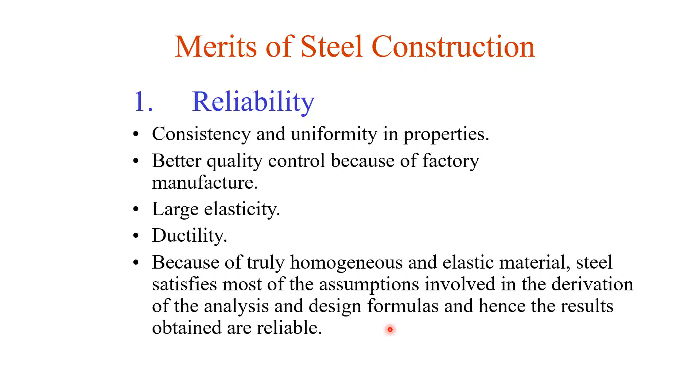For example, in concrete, we start from Hooke's law, and in Hooke's law we assume that the material is homogeneous. You can say approximately in steel the whole material is homogeneous, and that's why it satisfies Hooke's law. So that is again the reliability.

Industrial behavior. Hot rolled steel sections are manufactured in factories, and members may be cut and prepared for assembly in the factories.

Meaning, for example, this much length of steel member is needed, we can cut these members in the industry. Only joining of these components is carried out at the site by installing rivets or bolts or by welding different components. Meaning in the factory we manufacture the steel sections, we cut the steel sections, then we bring these steel sections to the site and connect them with connecting elements like rivets, bolts, etc.

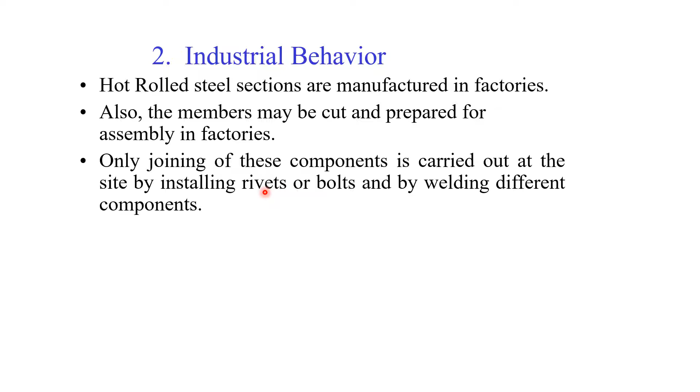Sometimes part of the structure is also assembled in the factories. That is therefore great adaptation to prefabrication. Nowadays the prefabrication industry is also growing.

So now you can see around that different types of prefabrication and prefab buildings are present, and manual errors reduce greatly. In such cases, the speed of construction increases and the total cost reduces. Why? We cut almost all the sections in the industry, so labor cost will reduce.

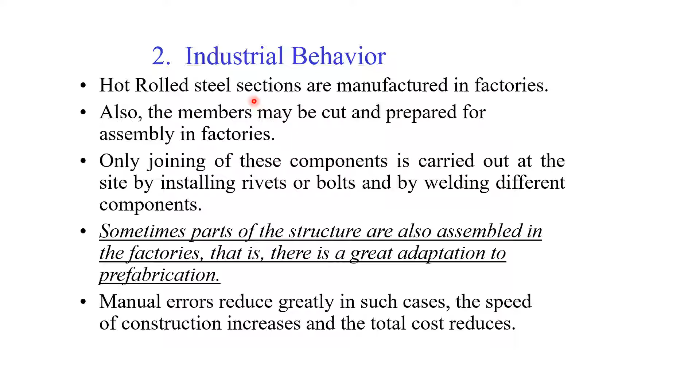We can make our buildings in lesser time. Lesser construction time. Because of the industrial nature of steel construction, progress of the work is very fast, making the structures economical due to the industrial behavior.

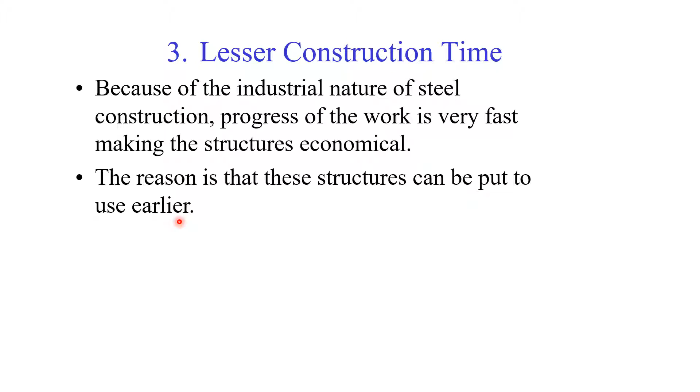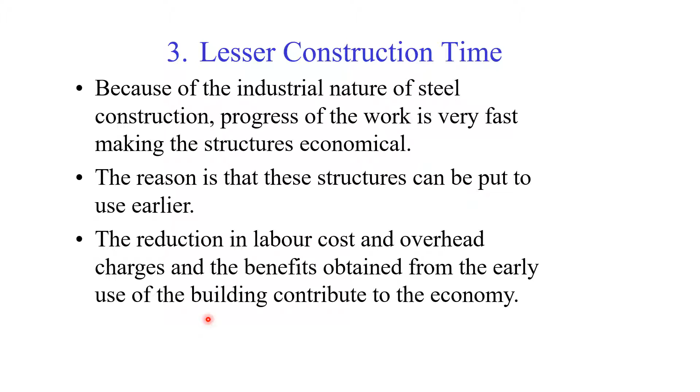The reason is that these structures can be put to use at an earlier stage. Meaning if our building is made in only 1 month, that is very good. We can start our business - that is, we can have early occupation of the building or early start of the business in the newly built structure. The reduction in labor cost and overhead charges, and the benefits obtained from early use of the building, contribute to the economy.

High strength to weight ratio and lightweight nature. Steel provides high strength per unit weight. Dead loads become lesser because steel sections are stronger but lightweight as compared to concrete. Dead loads are a bigger part of the total loads on a structure.

When dead load reduces, the members underneath become smaller. When the whole structure's load is less, the members that need to be designed will be of less weight. This is more important for long span bridges, tall buildings, and for structures having poor foundation conditions. At these locations, steel structures are also good.

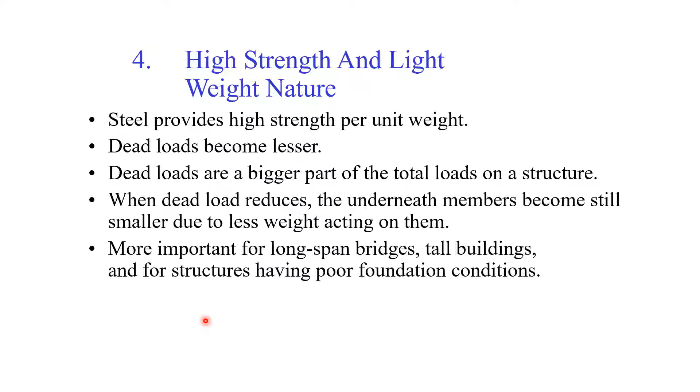Here is a differentiation of the weight to strength ratio - this is density over strength. You can see the ratio for steel is too good, that is 3.2 times 10 raised to power minus 4. When we divide the density by the strength of the material, we get these ratios.

You can see concrete is too heavy, wood is less, steel is lesser than wood, aluminum is also lesser than steel. So aluminum's cost is large, so that's why we go for steel and its structural properties.

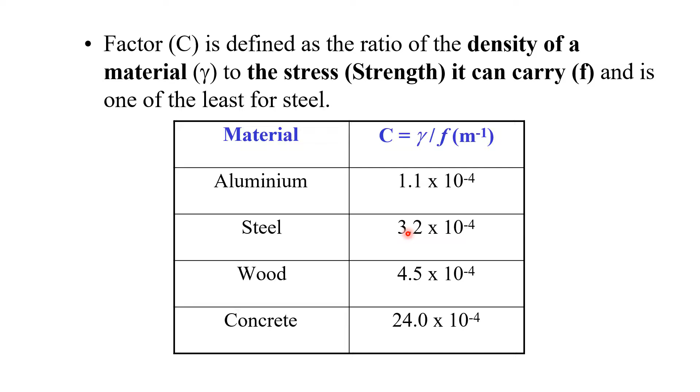Uniformity, durability and performance. Durability means long life of a structure. Steel is a very homogeneous and uniform material.

It satisfies the basic assumptions of most of the analysis and design formulas, due to being a homogeneous and uniform material. If properly maintained, with painting to avoid corrosion, etc., the properties of steel do not change appreciably with time. Hence, steel structures are more durable.

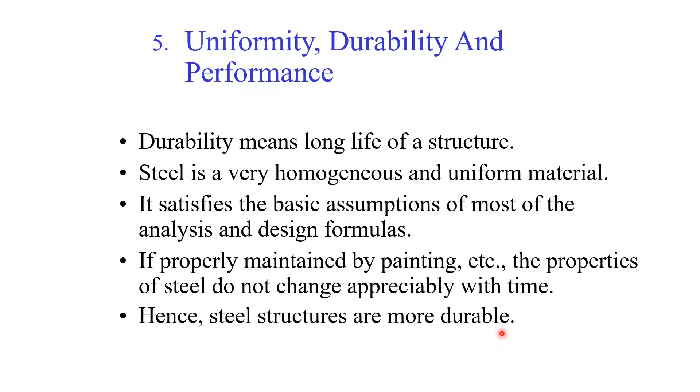The sixth property is elasticity. Steel behaves closer to design assumptions than most other materials because steel follows Hooke's law up to fairly high stresses. I think you know that steel, up to the yield point in the stress-strain curve, follows a straight line.

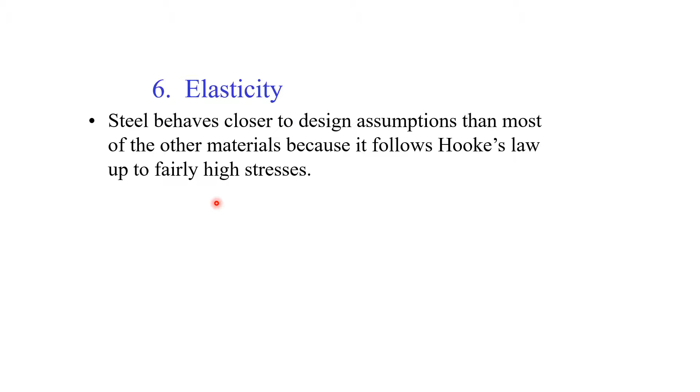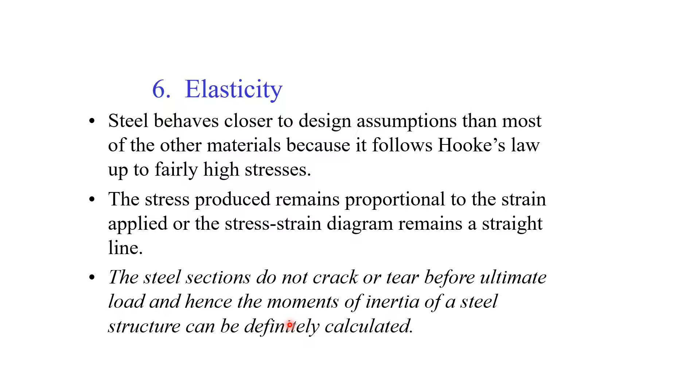The stress produced remains proportional to the strain applied; the stress-strain diagram remains a straight line, that is Hooke's law. The steel sections do not crack or tear before ultimate load, and hence the moment of inertia of a steel structure can be definitely calculated from the full uncracked cross section, so there is no chance of a crack moment of inertia in steel sections.

What is ductility and warning before failure? That is the seventh merit point of steel structure. The property of a material by which it can withstand extensive deformation without failure under high tensile stresses is said to be its ductility. After the yield point, steel has large deformation, and in the high tensile region this material can withstand large deformations without final failure. That is ductility, also known as warning before failure.

With large deformations, the occupants or residents in the building can evacuate or leave the building so that they can save their lives. That is the warning before failure. If there is excessive deformation, the occupant or resident will leave the building, which comes under ductility.

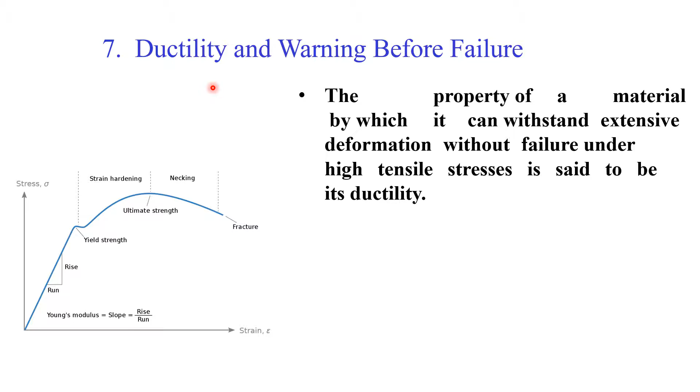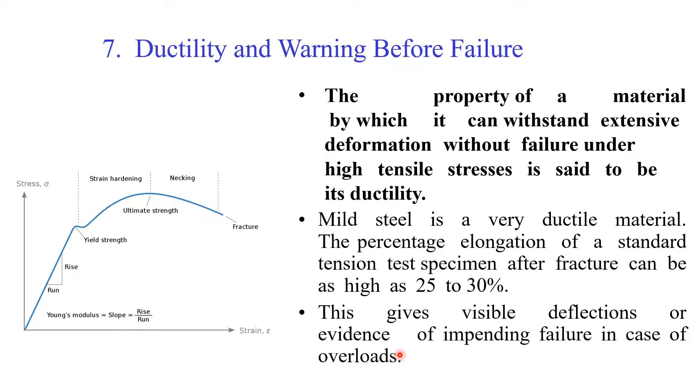Mild steel is a very ductile material. The percentage elongation of a standard tension test specimen after fracture can be as high as 25 to 30%. When we perform the tension test on steel bars, its length increases 25 to 30% of the original length. This gives visible deflections or evidence of impending failure in case of overloads. If heavy forces or heavy loads come on the building, there will be large deformations and the occupant can leave the building.

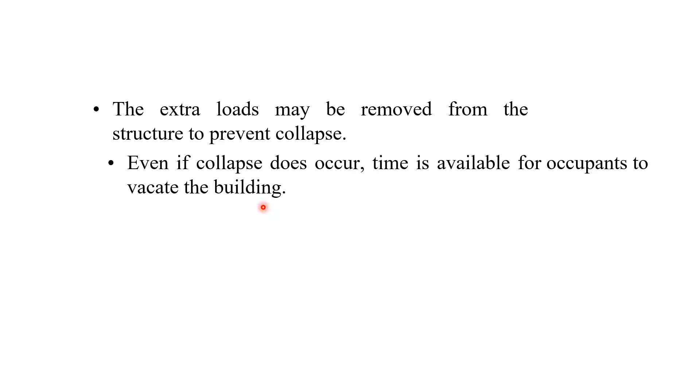If there is large deformation, one option is that the extra load may be removed from the structure to prevent collapse. Second, even if collapse does occur, time is available for occupants to vacate the building. So that is the warning before failure.

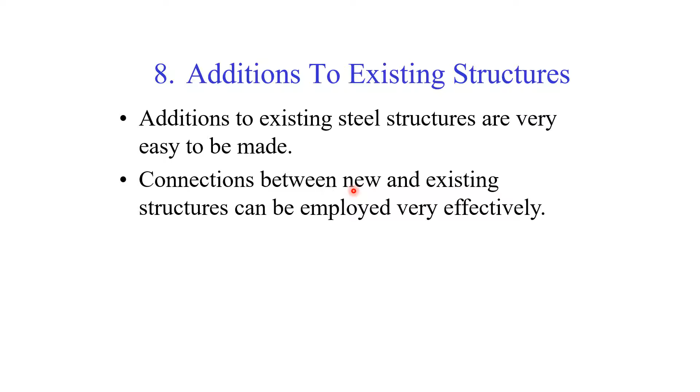Additions to existing structures: additions to existing steel structures are very easy to make because you can build the existing steel structure to extend or create a new story above the building. Connections between new and existing structures can be employed very effectively. New bays or even entire new wings of buildings can be added to existing steel frame buildings, and steel bridges may often be widened.

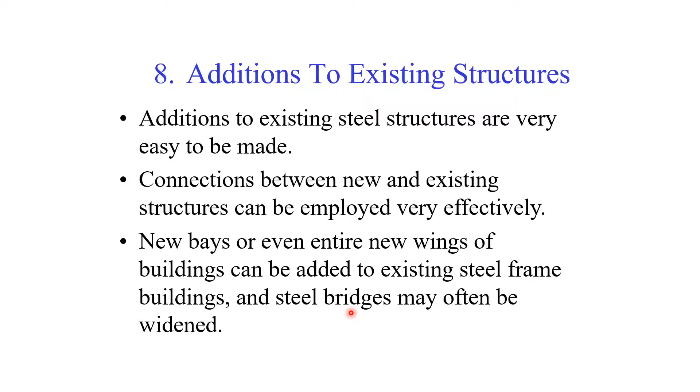What is new bays? The distance between two columns is called a bay. So new bay means new columns adjacent to buildings can be developed in steel structures. So that is the advantage: addition to existing structures.

Possible reuse: steel sections can be reused after a structure is disassembled. For example, if an industrial building is disassembled, its steel sections and members are disassembled. Now you can use these disassembled members at another location and rebuild the same structure as another building. So that is possible reuse.

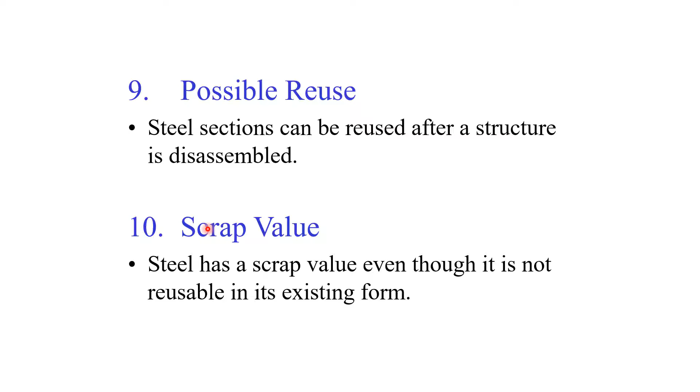At the end, scrap value: steel has a scrap value. Even though it is not reusable in its existing form, you can sell its scrap value at half price, even after demolition. Even if the sections are distorted or destroyed, the scrap value is still there for the steel structure. That property does not exist with concrete structures.

Watertight and airtight construction: steel structures provide completely impervious construction. Structures like reservoirs, oil pipes, gas pipes, etc., are preferably made from structural steel. You can see even in local water supply pipes, large diameter pipes, these are all watertight and airtight construction.

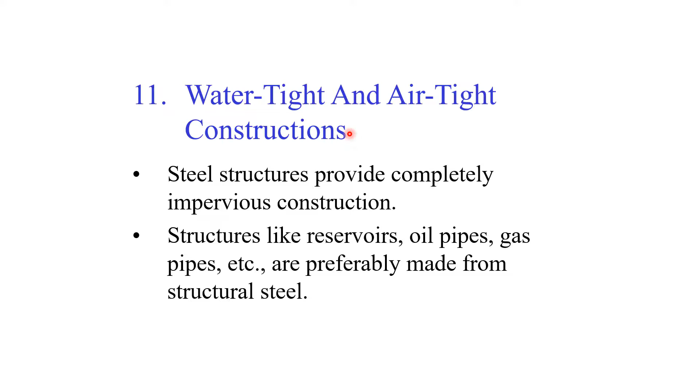Long span construction: high-rise buildings, long span bridges due to lightweight, and tall transmission towers, maybe telecommunication towers, etc., are made up of structural steel due to its lightweight that can go into high-rise construction. Industrial buildings up to a span of 90 meters can be designed using plate girders or trusses. That is the advantage of steel.

Bridge spans up to 260 meters, that is too large a distance, are made with plate girders made of steel, that is a type of bridge. For through truss bridges, spans of 300 meters have been used. So with the help of steel you can go up to 300 meters, that is too large a distance.

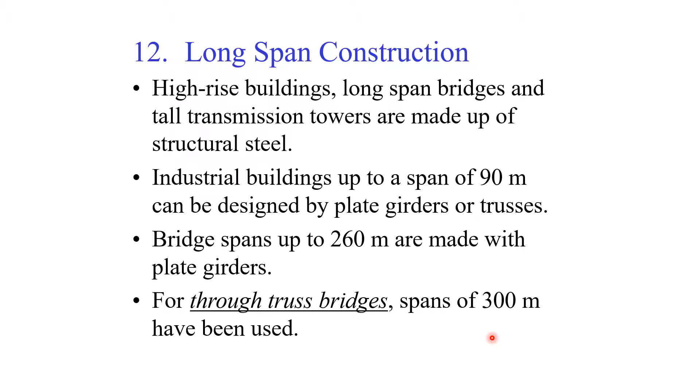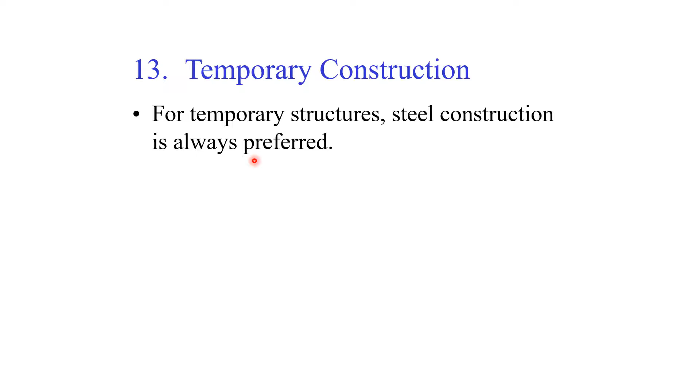Temporary construction: for temporary structures, steel construction is always preferred. For example, most common in the present era, you see steel structure formwork. Whenever there is construction of concrete, you build the formwork at the construction site, and after curing and hardening of concrete, you disassemble the steel structure and reuse it at another location. So that is temporary construction.

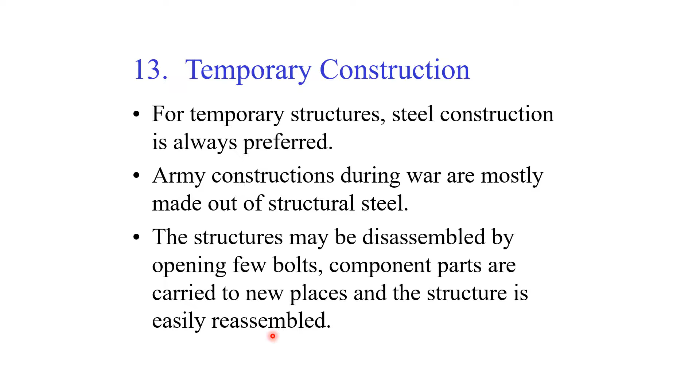Army constructions during war are mostly made out of structural steel. For making bridges, they make panels and join them to cross rivers and canals, also made of steel. The structures may be disassembled by opening a few bolts. Component parts are carried to new places, and the structure is easily reassembled, or the same structure can be made at another location, or its components can be used elsewhere.

Now the disadvantages of steel construction: high maintenance costs and corrosion. Most steels are susceptible to corrosion when freely exposed to air and water, and must therefore be periodically painted. If the painting is done and steel is free from water and oxygen, there will be no corrosion. So for that we have to do painting and other protective measures. This requires extra cost and special care.

The use of weathering steel, with paints, varnishes, and coatings that can resist the weather, in suitable design applications tends to eliminate this cost. The steel which has resistance against these factors can eliminate this cost.

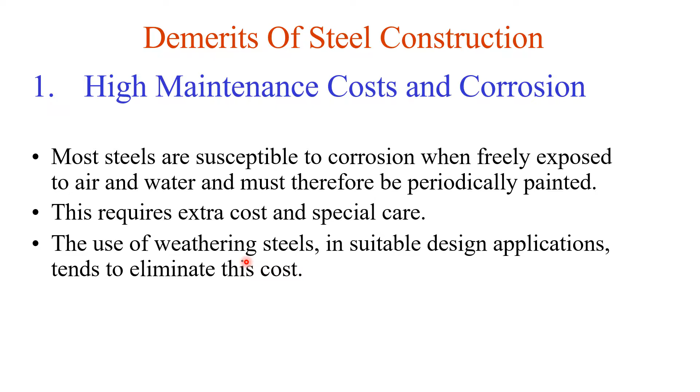If not properly maintained, steel members can lose 1 to 1.5 millimeters of their thickness each year. That is a disadvantage if not properly maintained. Accordingly, such constructions can lose weight up to 35% during their specified life, and can even fail under external loads, so protective measures are very important.

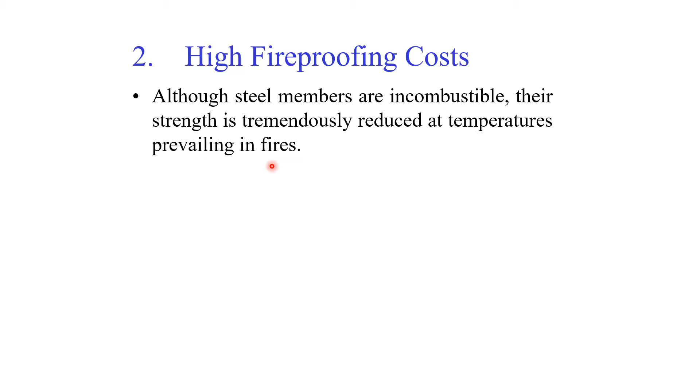High fireproofing costs. Although steel members are incombustible, meaning they are not burnable, their strength is tremendously reduced at temperatures prevailing in fires. At higher fire temperatures, their strength is reduced.

At about 400 degrees centigrade, creep becomes much more pronounced, meaning after that their deformations become permanent. Creep is defined as plastic deformation that comes after the yield point under a constant load for a long period of time. This produces excessively large deflections and deformations of main members, forcing other members to higher stresses or even collapse, after 400 degrees centigrade.

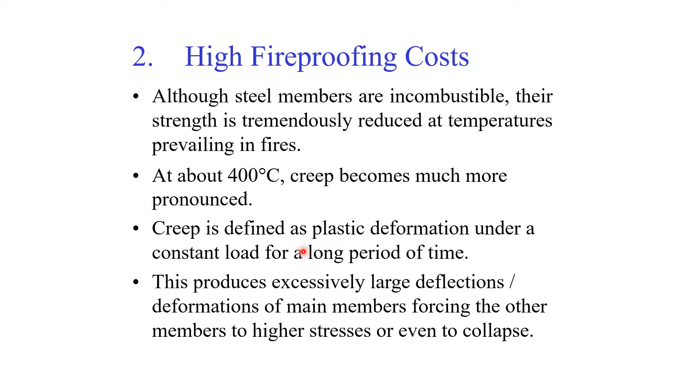Steel is an excellent conductor of heat and may transmit enough heat from a burning compartment of a building to start a fire in other parts of the building. For example, wood or any material can start burning due to the too-high temperature and transmission of heat. Extra cost is required to properly fireproof the building, so that is the disadvantage.

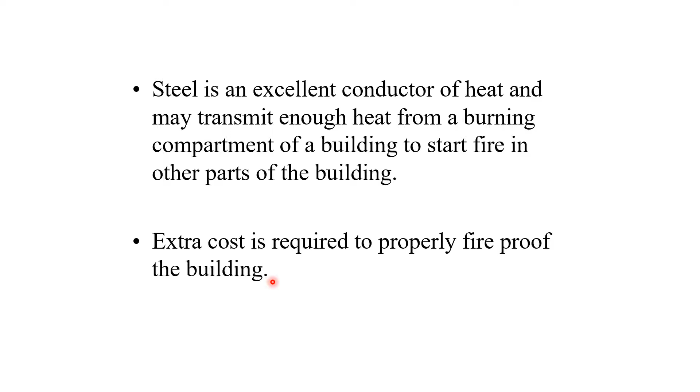This phenomenon is a disadvantage because in concrete sections buckling is negligible. Steel sections usually consist of a combination of thin plates, like the center plate and side plates for an I-girder. Further, overall steel member dimensions are smaller than reinforced concrete members. If these slender members are subjected to compression, there are greater chances of buckling due to the smaller cross-sectional area.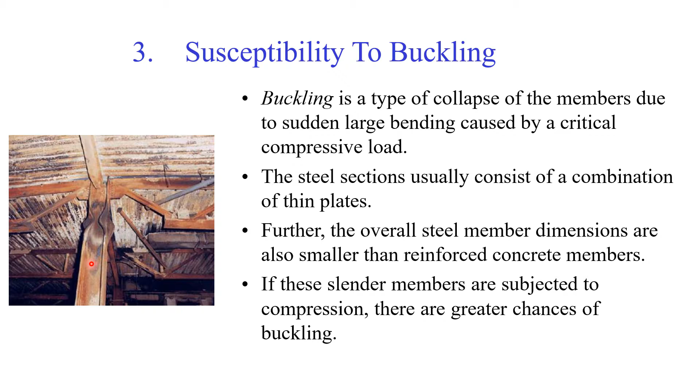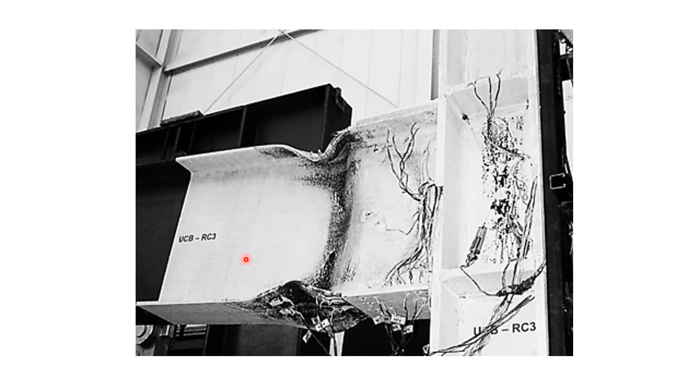Here is another testing of a steel beam. You can see the buckling phenomenon in this type of steel section. Sometimes steel used for columns is not very economical because considerable material has to be used merely to stiffen the column against buckling. To avoid buckling, we have to increase the steel cross section, so that is the disadvantage.

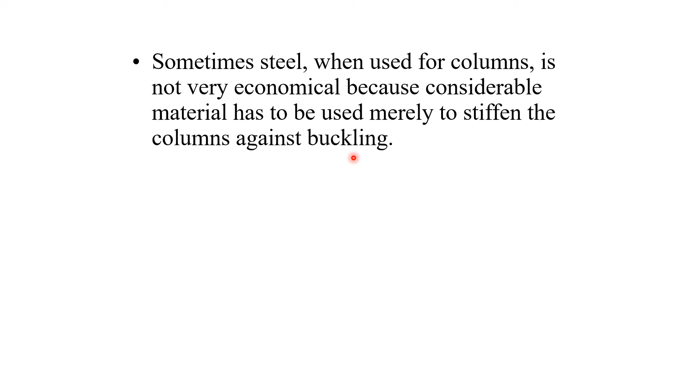High initial cost and less availability. In a few countries like Pakistan, where steel production is low, steel is not available in abundance. But in my own opinion, if you want to construct a building of steel, or make an extension of a new story on an existing building, you will not face such issues in the market.

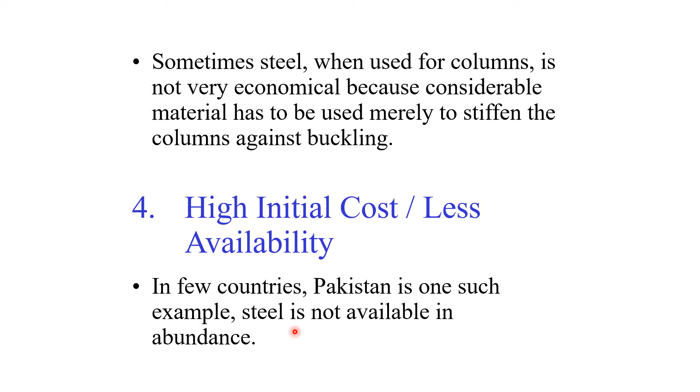If you go to the vendor and ask for a specific section, channel section, or angle section of steel, the vendor will be happy to provide it because he has that material. Hence its initial cost is very high compared with other structural materials, an issue due to this material not being in abundance.

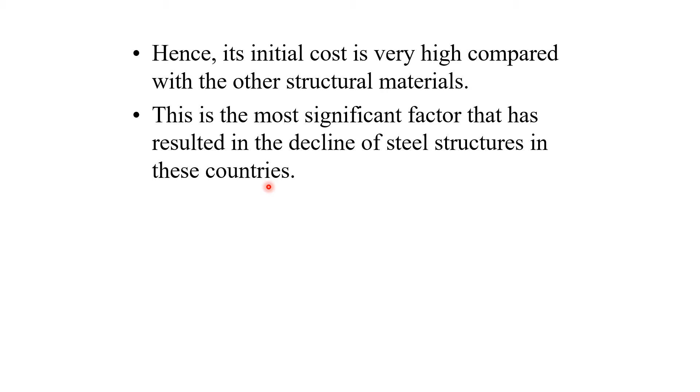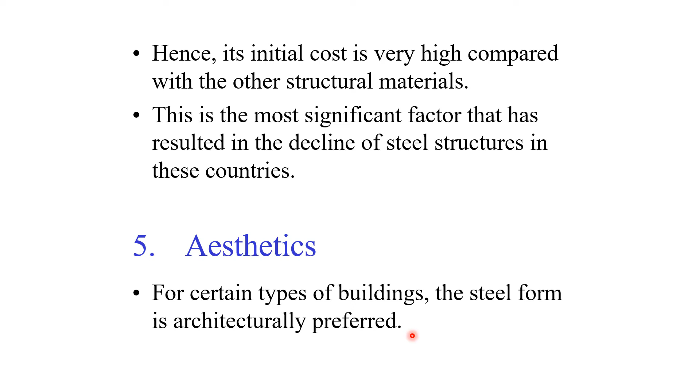This is the most significant factor that has resulted in the decline of steel structures in these countries. Aesthetics: for certain types of buildings, the steel form is architecturally preferred. However, for the majority of residential and office buildings, steel structures without false ceilings and cladding are considered to have a poor aesthetic appearance, and that is the issue.

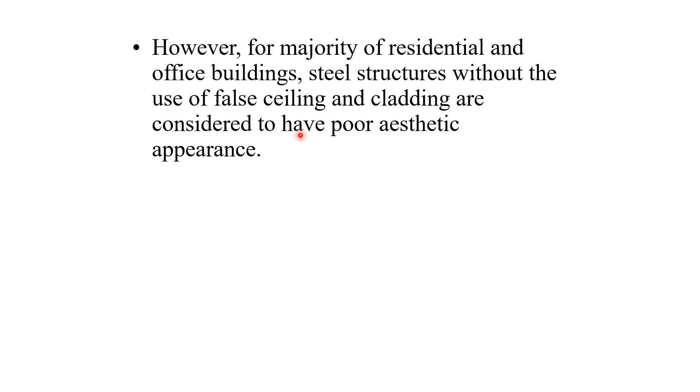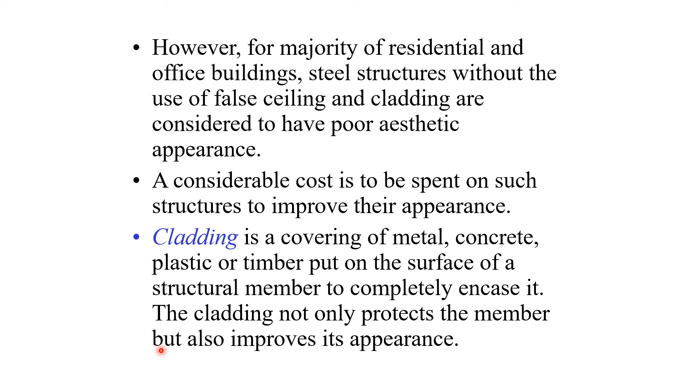To cover this poor aesthetic appearance, we have to provide false ceilings, cladding, or any material that covers it. Considerable cost must be spent on such structures to improve their appearance. Cladding is a covering of metal, concrete, plastic, or timber put on the surface of a structural member to completely encase it. The cladding not only protects the member but also improves its appearance.